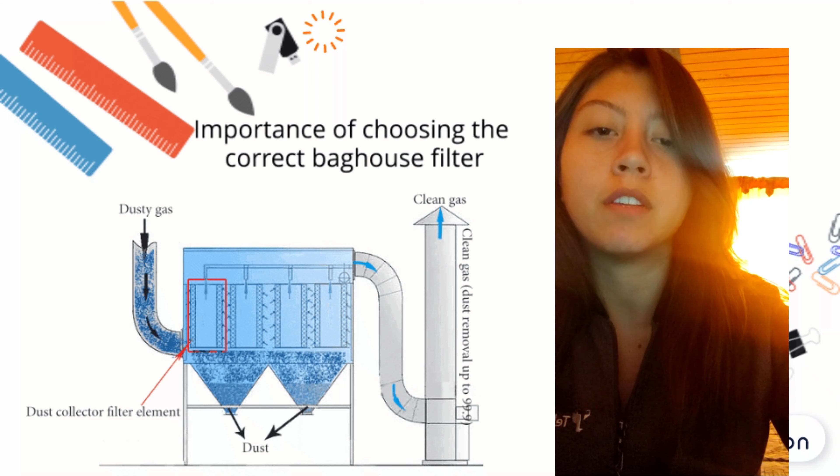With so many different types of baghouse filter fabrics and treatment options to choose from, it is important to know which is the best fit for your specific application. As a part of the process, it is split into a filtering period and a shaking period. During the filtering period, the milk powder is fed into a cloth by applying suction on the opposite side of the feed entry to make the separation easier.

During the shaking period, the bags are shaken by applying pressure so that the adhered powder falls and is collected from the conical base. Using a baghouse filter can help you improve performance in one of the four following ways: reducing operation pressure, increasing airflow, increasing filter bag life, and decreasing the number of installed filter bags. Less energy means saving money.

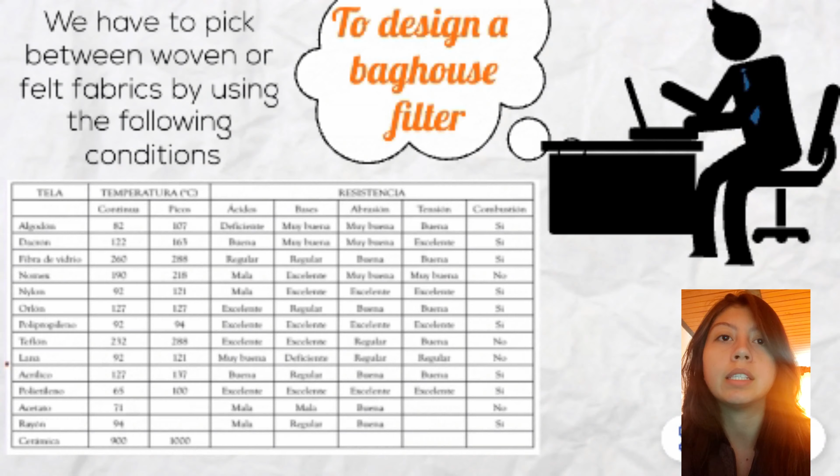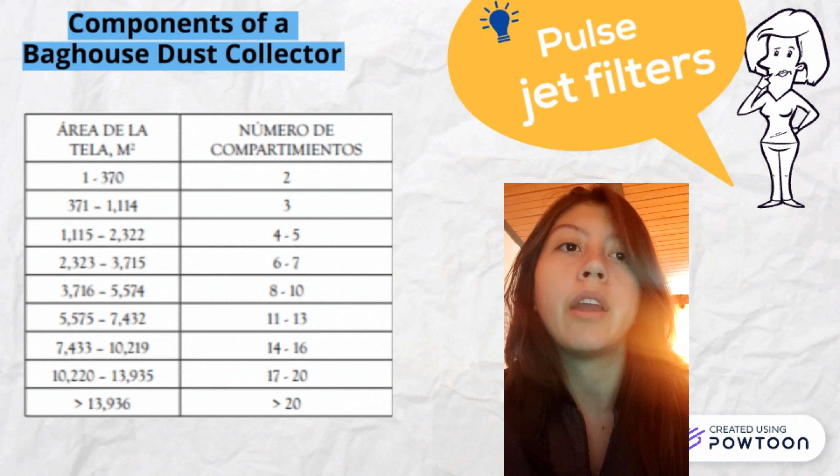In order to design the baghouse filter, we have to pick between woven or felt fabrics, by checking the properties of the materials used in a bag filter depending on the material, temperature, and resistance. Components of a baghouse dust collector. Depending on the cloth area, we can determine how many compartments are needed in our baghouse filter design. The capacity of a compartment is determined depending on the area of the cloth needed for the filtration.

Pulse jet filters use a short compressed air stream along the length of the filter bags to dislodge the contaminants and drop them into the hopper. Also, cleaning of filters is possible in pulse jet baghouses because compressed air pulses are pretty short. With this guide, we can calculate the number of compartments.

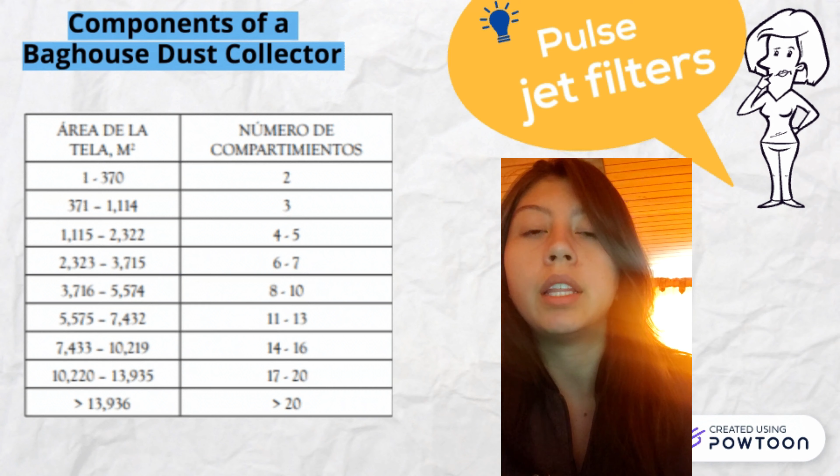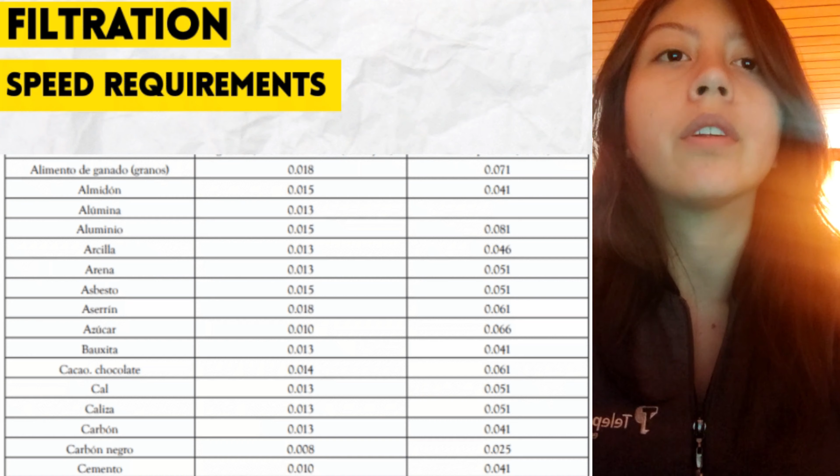Filtration speed. Efficient filtration requires that the filtration rate be in the range of 0.005 to 0.050 meters per second. Once we choose the fabric, we can use the following table in order to reference the initial filtration speed by identifying the type of particles to be removed, the filtration rate for woven fabrics, and the filtration speed for felt fabrics.

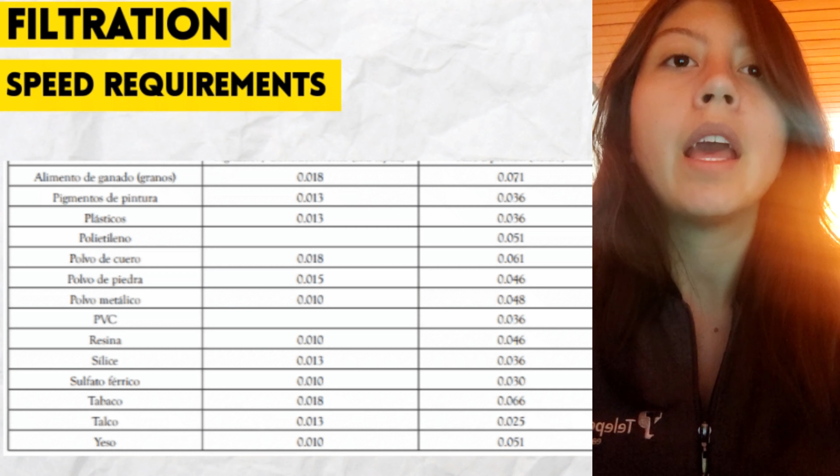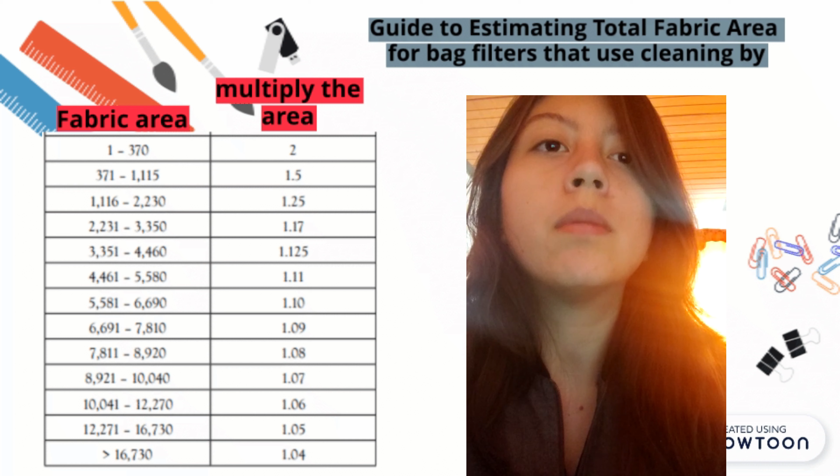The filtration area, the amount of cloth, should be increased to allow one or more compartments to be taken out of service for cleaning or maintenance. So we have to take the fabric area and multiply it by the number referenced in the table. For example, if you need a fabric area of 2,300 square meters, you have to multiply it by 1.17.

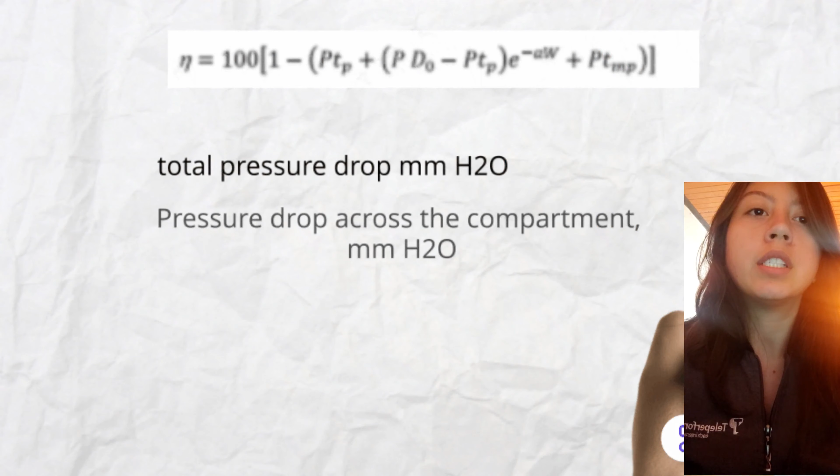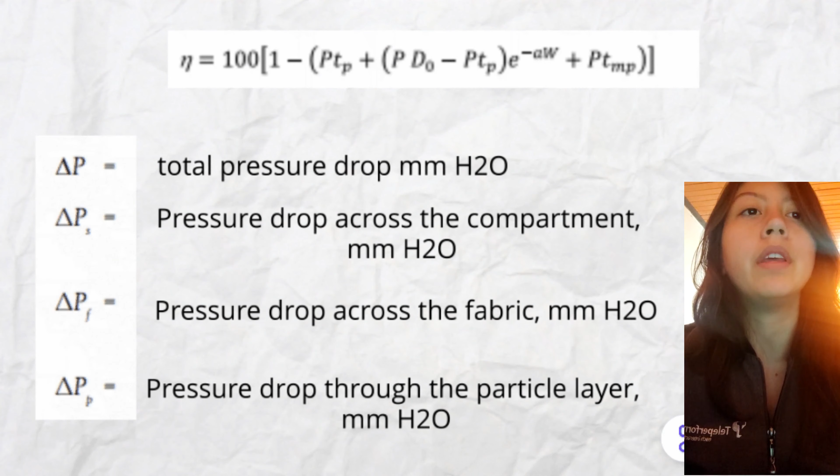Calculation of the efficiency of collection. The collection efficiency in filter bags is usually between 98 and 99%. With the following equation, the total efficiency is calculated as a function of operating time between cleaning cycles. We can determine that the efficiency decreases with increasing filtration speed, and that it increases with the accumulation of particles on the fabric.

The penetration due to pores of the layer of particles is a function of filtration speed and is given by the following equation, where B and C are empirical constants. The penetration due to particle morphology is a function of particle concentration and it is given by the following equation, in which P is particle concentration and C is an empirical constant.

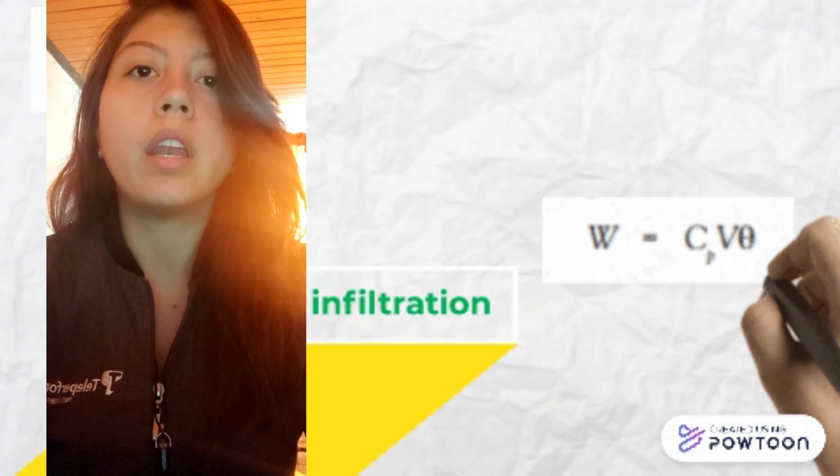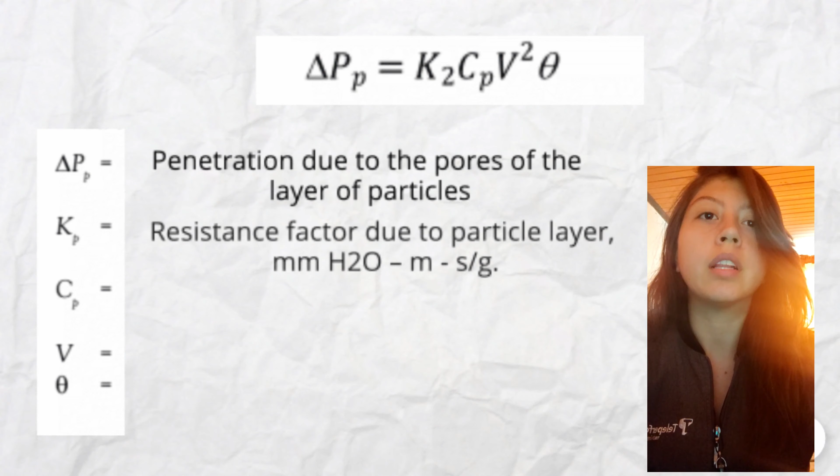The areal density of the particles is the mass of the particles per unit area of the fabric. Then we can use the following equation, where ΔP is the pressure drop across the fabric, K is the tissue resistance factor, and V is the filtration speed. The pressure drop offered by the filter cloth is proportional to the filtration rate. The pressure drop that can occur in the layer of particles that have accumulated on the cloth is calculated by the following equation.